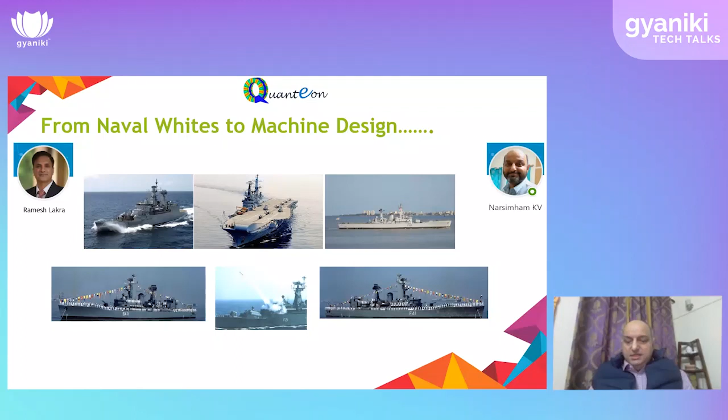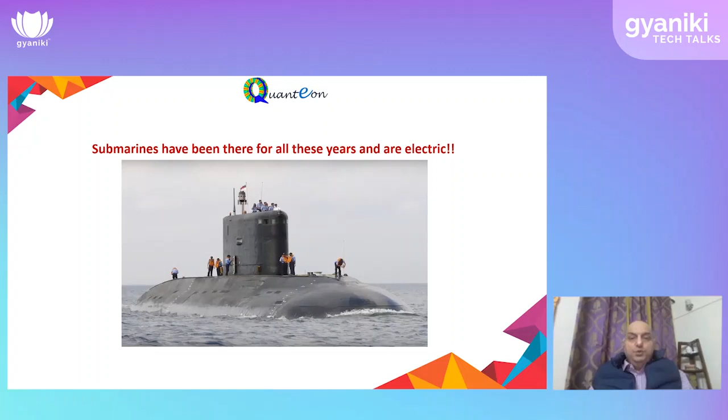Now, submarines, they invoke romanticism when you look at them, the thrill and the adventure. But at the bottom line, it is an electric vehicle. There are batteries which power it. Of course, they keep surfacing for charging. But at the end of it, it is an electric vehicle. And they've been there for all these years serving a purpose. So when you see it dispassionately, electric vehicle as a name has been existing for a while. It's just that now it is coming on to the civil street where the numbers are huge, and that's why it is garnering all the attention.

So why we chose machine design? Essentially, being in service, you get to do a plethora of things, which gives you a lot of exposure and experience and technical know-how, which ultimately adds up to give you a complete product.

Not that I would say complete product, but yes, it gives you a holistic view. So towards that end, in ships and submarines, low frequency analysis is very pivotal, especially signature management and other things play a big role when it comes to maintaining stealth at sea. So we got exposure to low frequency analysis, which is the key when it comes to machine design. So that is how it became a natural extension.

And with EVs coming into the market, we found that it was something where you could contribute. So in 2018, we were incorporated, and we have filed a patent for one high regenerative braking motor, for which the work will start probably in the course of the year. We are also working on another novel e-axle concept, which also is something for which we are filing a patent, which I will just touch upon later on in the talk.

So now electrical vehicles have caught the fancy of everyone because it virtually gives you a flexibility. IC engines meant that you needed engines which always were a bottleneck, and they were not the most efficient machines, so to say. Electrical motors, on the contrary, are one of the most efficient setups that we have, and it has been serving a purpose.

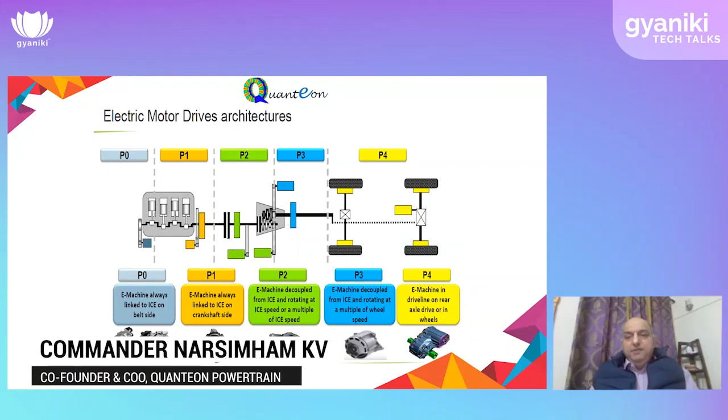Yeah. So coming back to the architecture, if you see, the genesis has been in this manner where now we are heading on to P4 and maybe even going ahead to P5. Essentially, you are moving the power to the drive axle, or in fact, moving forward into the wheels. Essentially, it simplifies your architecture. The whole existing architecture was to support an engine which cannot produce high torque at low RPM.

So you have to run the engine at a higher RPM. Consequently, you need a gearbox. And since it's not very wieldy, it is somewhere off, you need a transmission line. So all these things finally add up to losses. Whereas electrical vehicles give you an option of countering it. Whilst radial flux motors have presently been aping the IC engine structure, where you still use a high RPM motor, you're either using a reduction gear and then using transmission lines. You have an option of moving into the wheel.

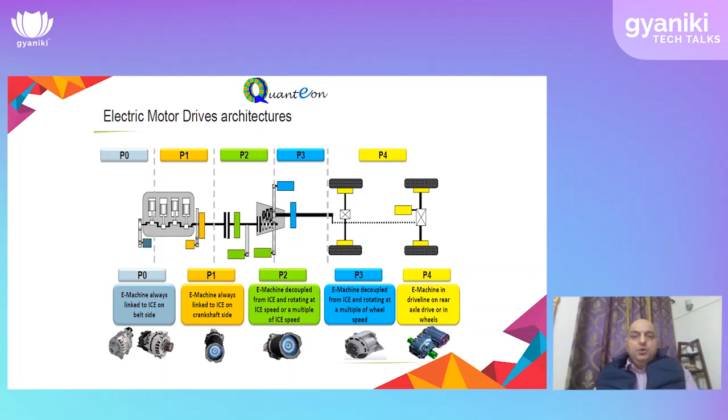So this is how the architecture presently is implemented. Of course, there are various variations. In our concept, we want to move into the wheel, which is probably now being called a skateboard configuration. Essentially, it simplifies your structure. You have a battery bed, you have a controller, you have your wheels, which power.

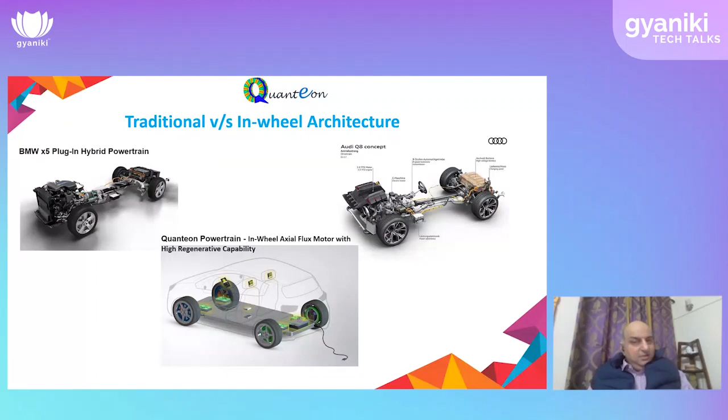I mean, if you go back, the Industrial Revolution was triggered by the wheel. So ultimately, life is coming full circle, and we moved away from the wheel. We achieved something, and courtesy electrical vehicles, we are moving back into the wheel. So does this bring a unique proposition? I think these are all self-explanatory. I would not hover much. But the first point is critical, that any form of transmission line introduces certain losses. So by moving into the wheel, whatever be the challenges, that is one element that goes out the window.

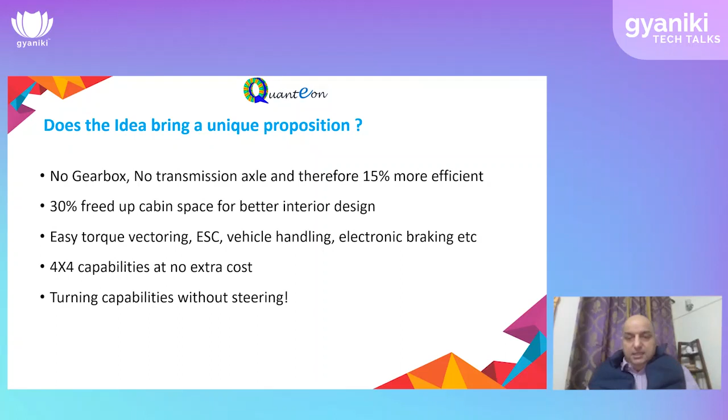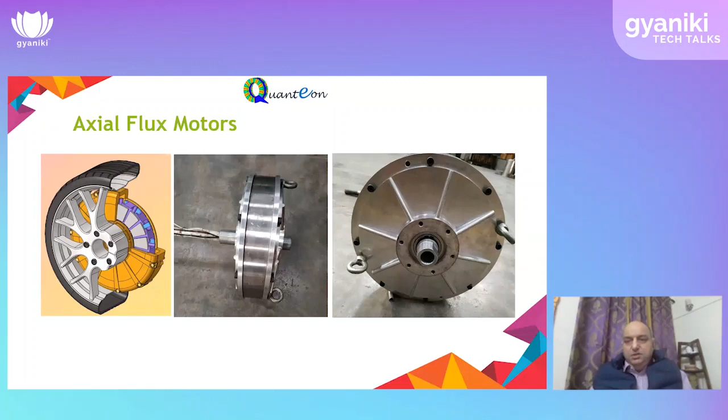So what happens is, in a typical motor, if you see, your rotor diameter is very small and it's cylindrical. So the area of interaction for flux is fairly limited. Whereas in axial flux, since it is along the surface, you get a better and larger surface area, which is what helps you to generate more power, because in a motor, the more the flux, the more the power.

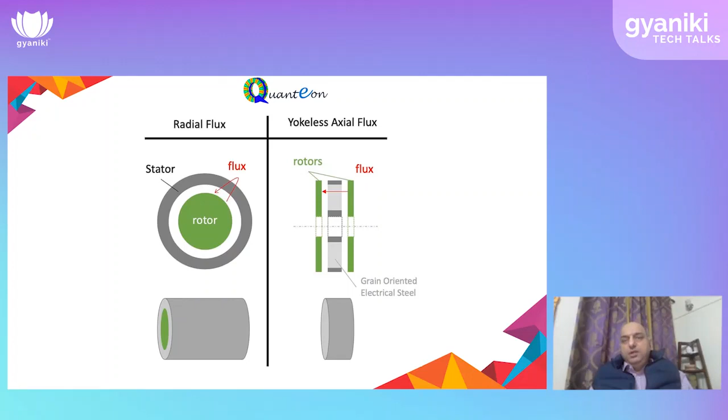So this is just another illustration of the manner. Left is the motor that we usually see everywhere. Right is the one which is the yokeless motor, I mean axial flux motor, which are also called pancake motors. Essentially, the surface area for a same diameter in axial vis-a-vis radial is about 5 to 6 times. So that's how power dense these motors can be. And this is what we are trying to tap into and take the design forward.

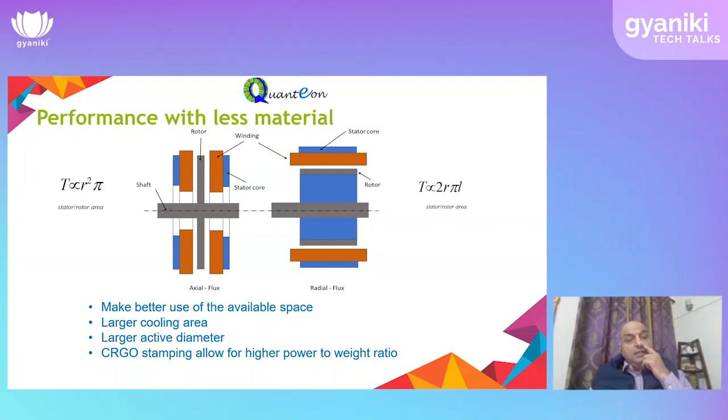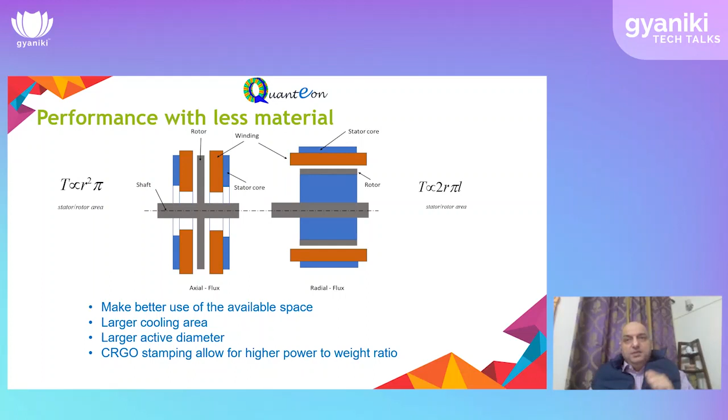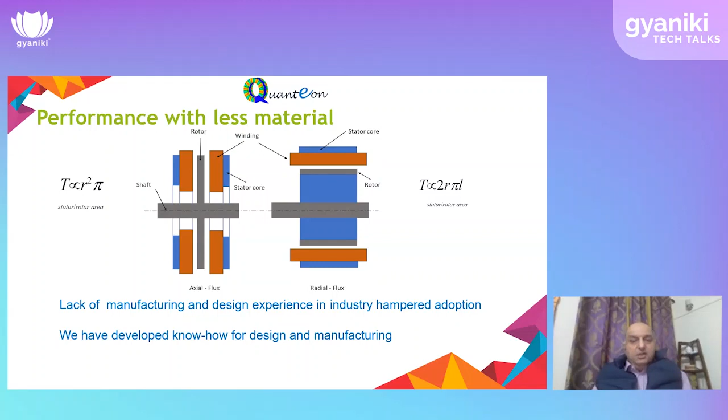And the single biggest stumbling factor for this technology has been lack of manufacturing, because they've been there for a while. It is not that axial flux machines have not been there, but they've been in form factors which have not entirely been the most efficient. That's why they didn't have much horizontal proliferation.

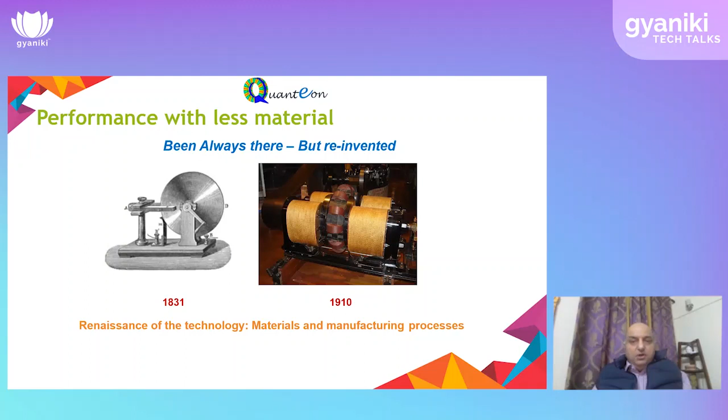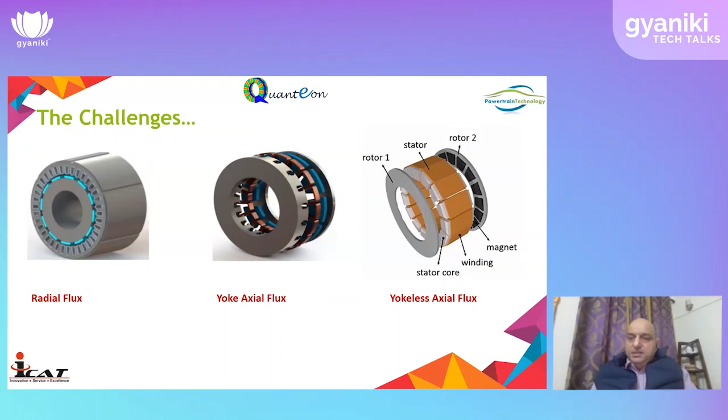So if you just observe this slide for a moment. On the left is the radial flux, which we all know. The stampings are symmetrical. In the center is the yoke axial flux, which is still a bit easier to manufacture because there is a back iron which is facing you on the screen. On the extreme right is the yokeless design, which we are trying to work on, in which it is actually a segmented stator which is held together. So the challenge becomes a bit daunting there.

And the biggest challenge here is, if you notice the slide, the stack has got lamination sheets which are all cut in different shapes. So this is a tooling nightmare. And this was the single biggest challenge for axial flux machines so far. That's why people went into powder metallurgy and they would laser cut it, making this absolutely very expensive.

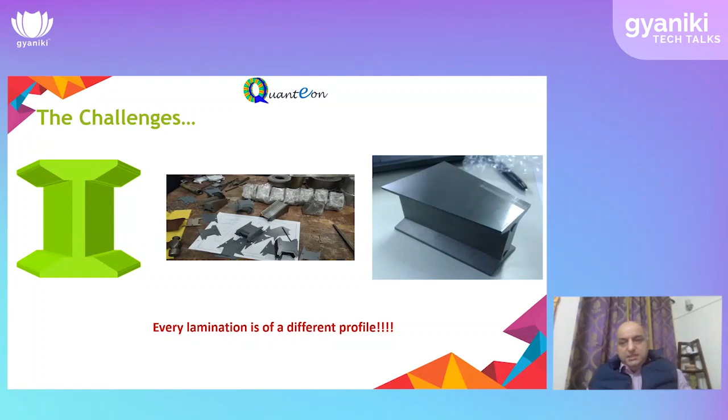So axial flux machines remained confined to aerospace and missile and defense applications because the bandwidth to absorb the cost was there. But as a commercial product, there were challenges, which we have now, with our typical Indian jugaad, sorted out. So we are good to go insofar as the stamping is concerned. Rest everything is a bit challenging, but manageable.

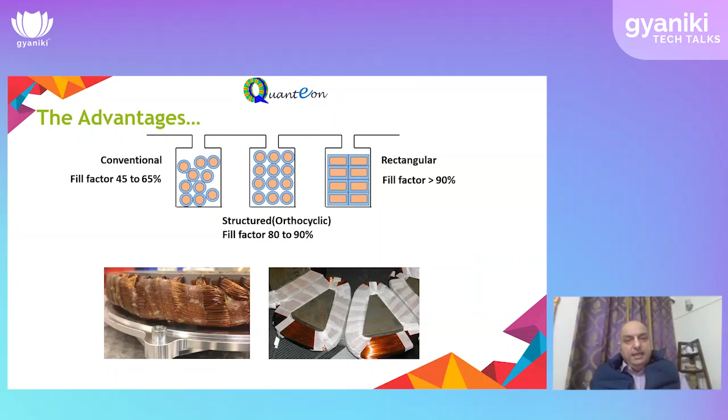So if you see, another advantage the axial flux machine gives is the winding. On the left is the radial flux winding, which you have all seen. It's like a jungle. But on the right, you see the axial flux winding, wherein you can get excellent fill factors and very, very compact. So this also helps in making axial flux machines more power dense because you are able to use the copper area maximum.

So just to once again go over the basic advantages that axial flux offers: no end turns, so less heat; yokeless stator, which allows you the shortest flux path. You can have a configuration in which you can put two rotors, which makes it even more power dense. Cross-sectional wires you can use, which makes the fill factor very high. And the size of conductor that you use is much, much thicker than what is used in radial flux.

So the basic problem of a winding in which low insulation happens because your winding goes off is virtually history here. It will never happen. Concentrated winding, as I mentioned, gives you very high fill factor. And the ability to use grain-oriented steel is one of the biggest advantages that the axial flux machine gives, because for the same weight of iron, you will get 30% more flux.

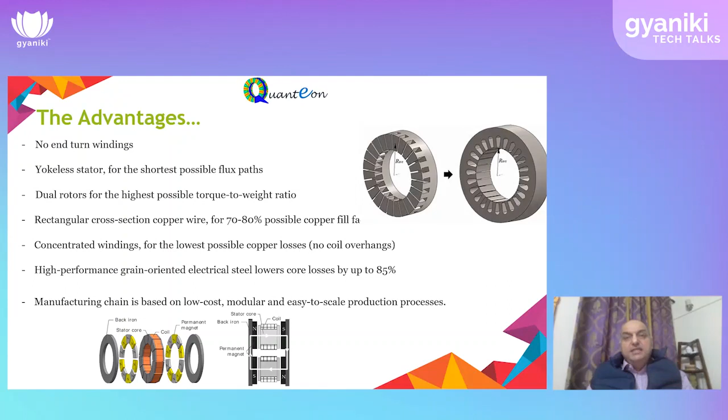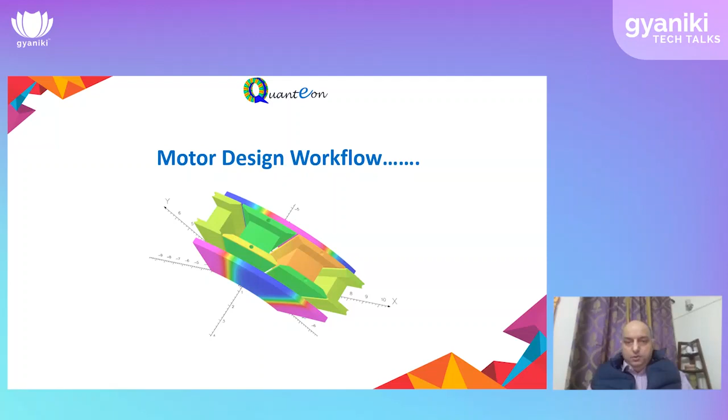So now I just request Commander Lakra to take over and briefly share on how we go about the motor design workflow, and then probably we'll just wind up. Yeah. So, am I audible? Yeah. So I will just briefly cover that.

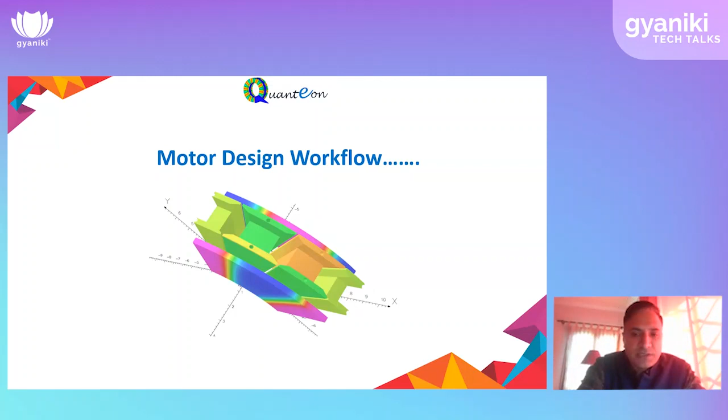How do we decide which motor to have? How do we quantify it? Then how do we plan our work? How do we do things analytically? And then thereafter we get down to making it into a workflow, in which I tackle right from sizing it to the requirement that we have, to going to electromagnetic design, going back and forth. So I'll just briefly cover that.

So typically we see that for an electrical vehicle, how do we decide what motor to go for, whether it is a permanent magnet or induction or SRM, axial flux or radial flux, frame motor, hub motor. High RPM, low RPM. All these factors are decided by a particular application, because the way a two-wheeler needs performance and range is different for somebody using the same two-wheeler for fleet than for somebody using it for personal use. Similarly, the way a passenger vehicle needs output from the motor is different from the way a commercial vehicle needs it.

Go back to the previous slide, Naseem. It is all listed here. I need to know what kind of starting torque I need, what kind of weight I need, what kind of speed I need, then what kind of overload I need, and what kind of efficiencies I need. So I just combine all these factors first. I write it down, and thereafter I go through the actual dimensioning.

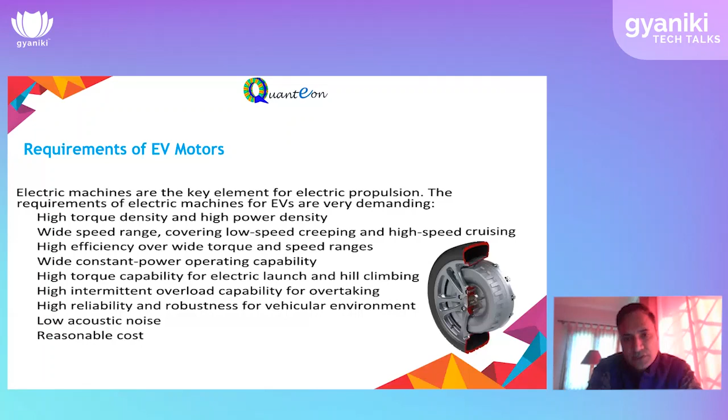Next slide, Naseem. Yeah. So then, once we know the application that I have in mind, I see what kind of weight it is going to have, because, as we know, Newton's law of motion and other dynamics of motion have to be translated to a graph, and that graph should give me what is on the right side after the driving cycle analysis: this is the torque I need for peak performance, and this is the torque I need for continuous operation. And I have to map it with the different speeds, whether I'm going to go for a direct drive or a gear drive, a single reduction gear or a multiple reduction gear.

So once I figure that out, I would have covered the entire driving speed range that I have in mind. I also need to see whether it is to be driven on a hilly road, on a plain road, or it's an off-road vehicle. What kind of drag it is going to have when it comes to high speed, so that is where the air drag becomes very important. What kind of wheel it has got, what kind of flexibility I have within that particular range to go up and down in wheel size.

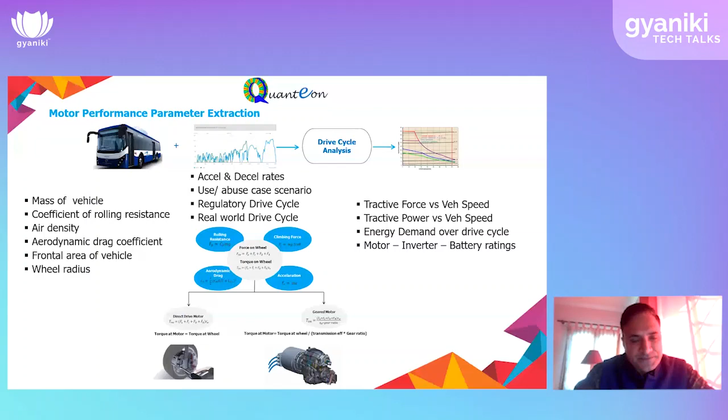So once I have defined the requirement, then I go to the electromagnetic design. I would have dimensioned these 4 factors, which are stator and rotor ID/OD and the pole formation that I have. And then I get down to the actual simulation. These illustrations are of a typical axial flux. The first, on the left side, is a typical stator and rotor design. The second illustration is about the thermal calculation. And the third is on the mechanical calculation that we have done.

We have done various simulations on stress, NVH, optimization of weight, fatigue. Thereafter I go back into the loop, whether my torque speed curve as I defined in the first slide has been met. If it has not been met, I go back in a kind of if-else loop, and I keep going up and down on the EM, thermal and mechanical until my optimal design is done, until I am satisfied with the efficiencies, which are on the bottom right corner. Once I do that, then I get down to the prototyping.

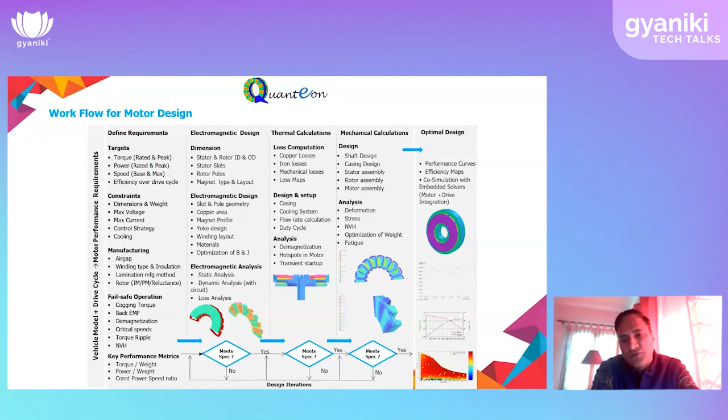Now, as we know, a radial flux motor, typically, if you look at the motors which have been supplied by US Motor and Chinese and a lot of others, they are very efficient around rated RPM, which is around 40 to 50%, at times 60% of the peak RPM. Beyond that, when you go closer to the peak RPM, I have taken a very best case scenario wherein I believe that it is 70% efficient. But in some of the motors that I've seen, it even dips to 40-50%. So that is where your battery needs to sustain.

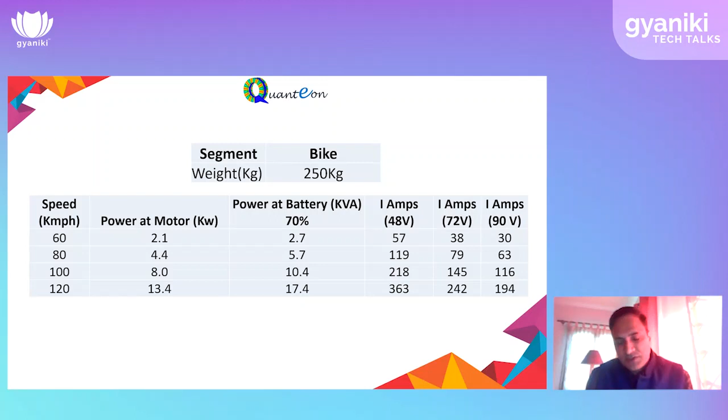So I think some of the manufacturers have to be very clear that when it comes to sizing of a motor, you cannot pick an arbitrary figure that I need this particular torque and so and so kilowatt of motor for a two-wheeler, three-wheeler, or four-wheeler application, because the physics doesn't allow. So I think this is a very important slide. And depending on the weight, you can also extrapolate; it's very simple, it is available on the internet also. Whatever weight you give, you calculate a torque, you have a mechanical power, convert to electrical power, put in your efficiencies, put in your battery pack, dip in the voltage, and you will get the rating that you need. So that is how the physics plays. Yeah, thank you. I have finished.

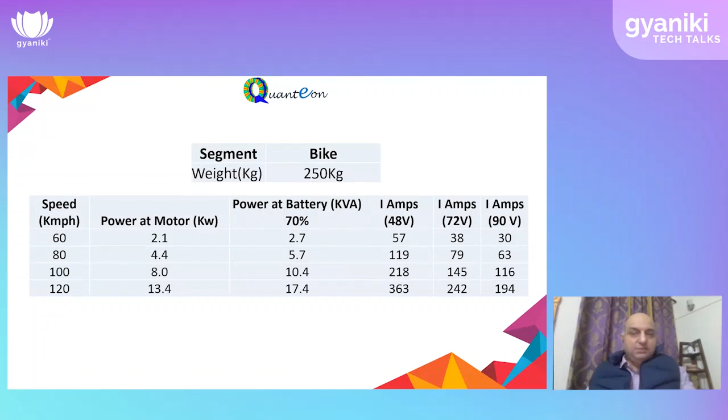Yeah. So we wanted to share that maths essentially because we get many calls every day in which they say, I want so and so kilowatt and I want something. We ask them two questions and we never get a call back. So we realized that this is a gap, because everybody worked around a model in which they would pick up a motor and then design the vehicle. But ideally, it should be the other way around, and that is the flexibility that we want to bring to the table. So that's why we specifically included this bit. This I will skip because I think we have overshot our time.

I will just take about half a minute to run this video. I hope you're able to see. So we use an Opera tool for our simulation, and we have made our own script based on our work for the last 2 years. Axial flux design, for those who have some exposure to EM design, is a 3D simulation, which involves a lot of modeling challenges. So we have optimized it in a manner we call Jarvis.

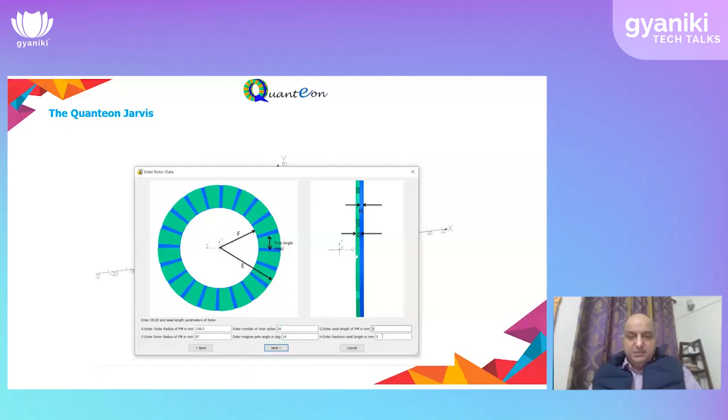I give my stator dimension, I give my rotor dimension, I lay out my winding requirements, I give the dimension of the magnets, the thickness of the magnets, then I define the material properties of my stator and the winding. I give my voltage. These are all what we calculate analytically as part of the process of motor dimensioning. I input the data and this model is ready. And this is exactly the time it takes in practice. Otherwise, this activity of making a model takes nothing short of 2.5 to 3 months. For a particular kind of motor, we have already done this, and going forward, we are doing it for all our motors.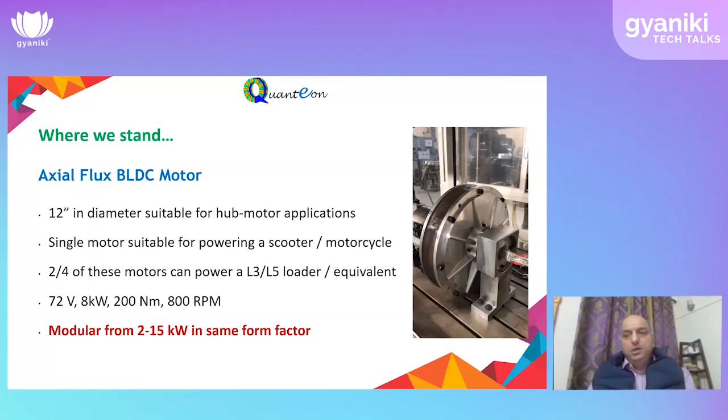Now, what exactly are we prototyping and where do we stand? This is the first prototype which we have done and tested, which is in a 72-volt configuration, 12-inch diameter, which can give you all the way up to 210 Newton meter. This is a modular design. The whole idea was to reduce the tooling cost. So in a 12-inch hub motor, which is conventionally the most widely used two-wheeler platform, we can give entirely all these combinations and even anything in between.

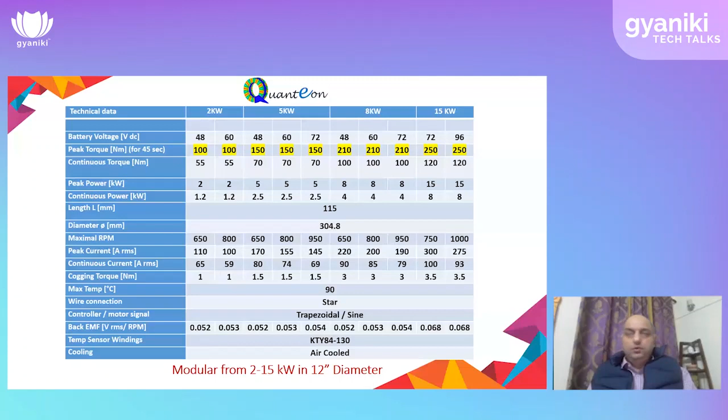And going forward, whilst one motor can power any two-wheeler which is there, 2 of them or 4 of them can be taken on to platforms in the skateboard configuration to power even 4-wheelers. The second motor that we are prototyping is a 19-inch diameter motor, which is about 50 kilowatts. So 2 of these motors can power a small 30-seater bus, and 4 of them can take the load of the entire bus. So this is in the middle of testing. We intend to finish it by next month end.

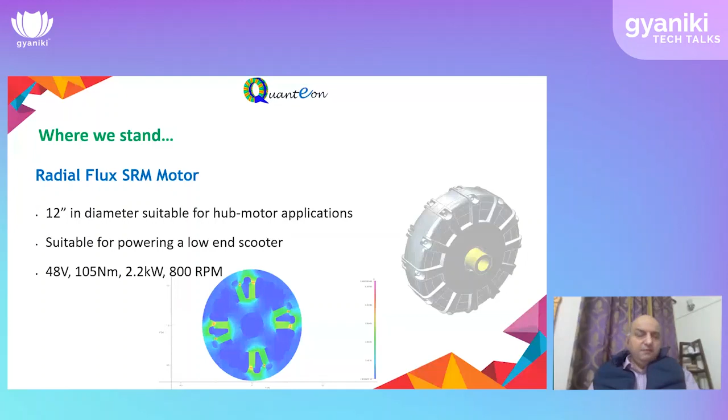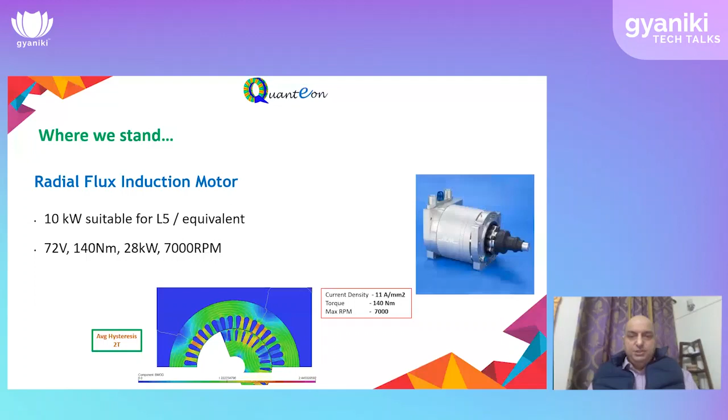Now, this essentially covers what we are trying to do. We would be happy if you can reach out to us for powertrain solutions and validating motor design and audit. And we believe that charity should begin at home. So not as an ambassador for Tata, but I have an EV, going forward, as an article of faith that EVs are the future.

So I think I have finished now. Harsh, you may please take over. Thank you. Thank you very much, Commander. That was a very, very detailed presentation. I think you pretty much took over most of my questions, but yeah. Okay. So I'm just going to dive right into questions if that's okay.

The first one is, you highlighted some really great points about the skateboard design, right? The hub motor configuration. From a platform engineering standpoint, from active dynamics, it definitely has a lot of benefits over conventional designs. But at the same time, can you highlight some drawbacks of the design, or rather challenges that you see? Because if you're looking at a two-drive setup versus a 4-drive setup, you would need 2 motors versus 4, and have that entire assembly within the wheel. So from that perspective, what sort of challenges do you see?

Lakra sir, you will take it, or you want me to? Yeah. I'm okay to.

So as was covered in the presentation, manufacturing has definitely been a challenge. Cost has been the second challenge. So we have thought about all those issues. Manufacturing, we have figured out how to do. In fact, we are investing in tooling now. For this tooling, I went to Europe, I went all around to figure it out. I was told that there is somebody in the US who's got a patent, it cannot be done. So we have figured out our own ways to do the stamping with a manufacturer who has done an excellent job. We have gone through the preliminary process, and now we are investing.